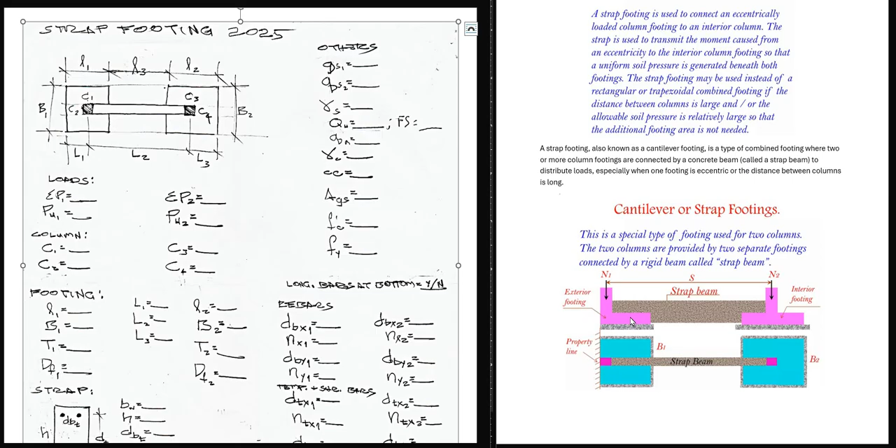There are three basic considerations for strap footing design. Number 1, strap must be rigid. Perhaps moment of inertia of strap over moment of inertia of footing must be greater than 2. This rigidity is necessary to control rotation of the exterior footing.

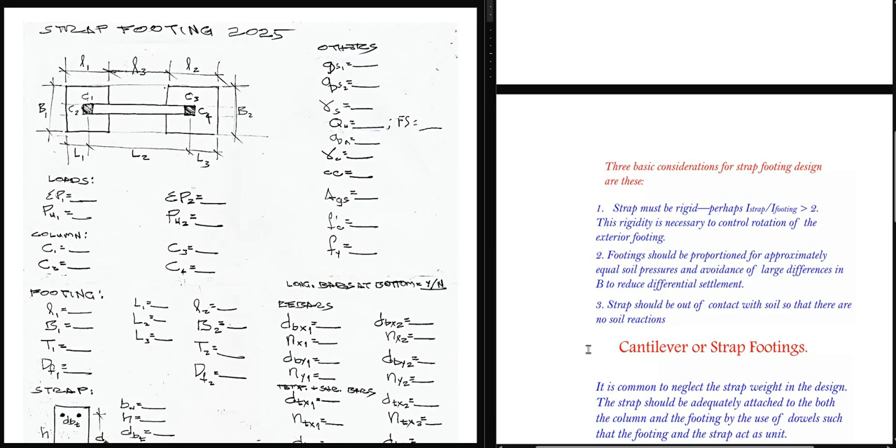It is common to neglect the strap weight in the design. The strap should be adequately attached to both the column and the footing by the use of dowels such that the footing and the strap act as a unit.

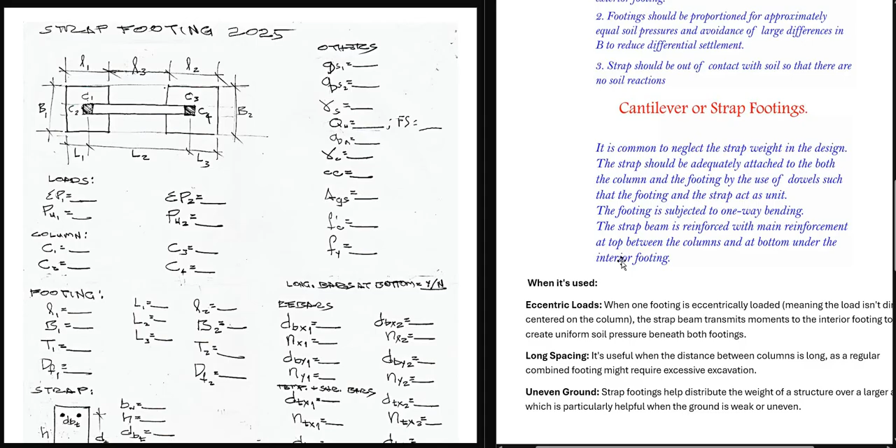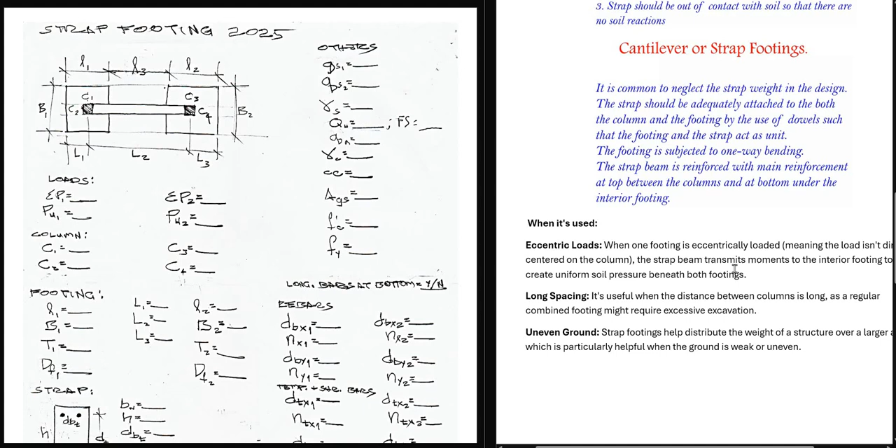So when is strap footing or cantilever footing used? Number 1. Eccentric loads. When one footing is eccentrically loaded, meaning the load isn't directly centered on the column, the strap beam transmits moments to the interior footing to create uniform soil pressure beneath both footings.

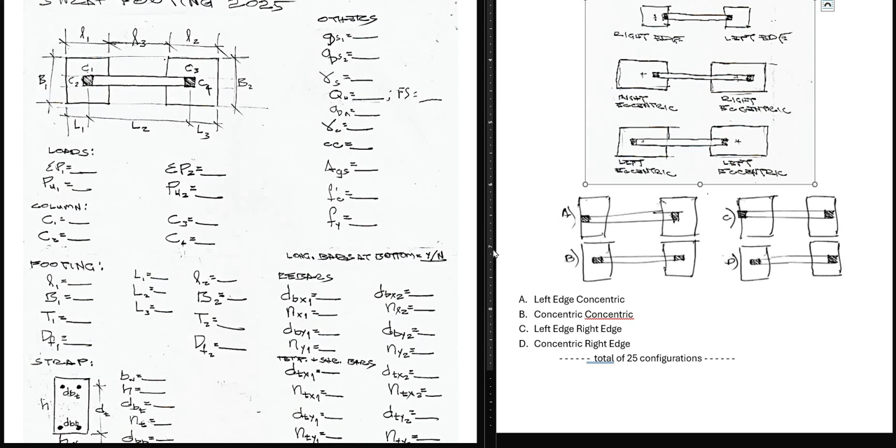Okay guys, so that's the introduction for strap footing.